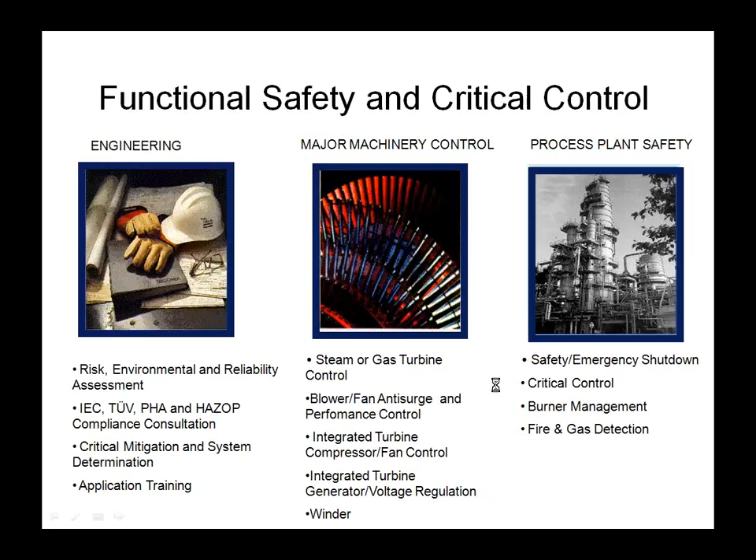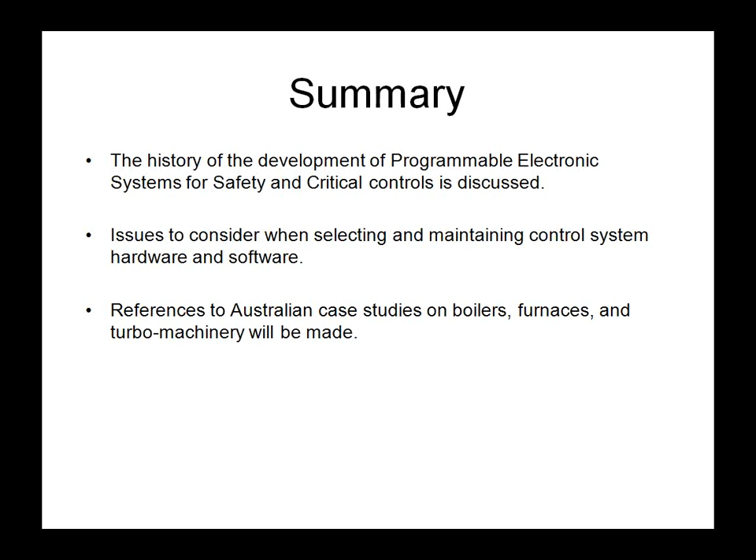Okay, so the talk will cover a bit about the history of the development of programmable electronic systems, which is another word for logic solvers in a safety and critical control context. It will talk a bit about issues when you're either choosing one to buy for the first time or maintaining one your organisation owns, and I'll talk about some examples.

So first of all, just to define what we mean by safety and critical control. Well, virtually everything is safety or critical to somebody. I mean, the air conditioning control on the wall in your office, if it's working okay, it's fine. If it's not working okay, it becomes critical. We had a time in my office in Melbourne, two weeks ago, it went off for a while and it was out of control.

So everybody was really impacted, and that's just a small smattering of the impact of a control system that might be operating a power station or a chemical reactor in an oil refinery. The impact of a malfunction there can be very, very large indeed, not just discomfort of people, but big economic impact or even a safety impact to people and the environment. So very much you would like to have some guidelines to decide what is safety and critical, and unfortunately the answer to that is it all depends.

And people hate me to say that, but it's true. So for example, this air conditioning system, if that happened very frequently, it's a small consequence, a little bit of sweat. If that happened every day, the company would lose so much productivity that we'd have to either relocate or we'd have to suffer some severe economic inconvenience, even after a relatively small, low consequence event at the time. If it happens a lot, it becomes a big consequence.

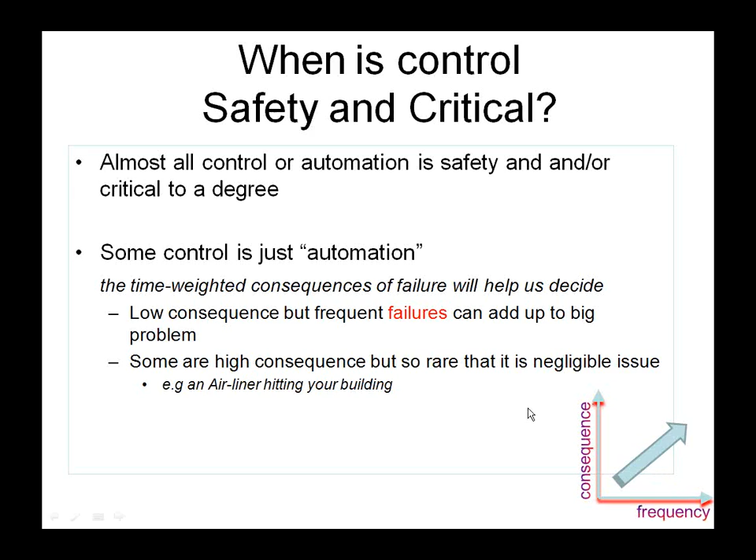So in the down-to-earth situation, if you have a business or a production line that's entirely dependent on the equipment under control, which is the plant that's being controlled by both the combination of the control system and the safety instrumented system, then if that represents a large part of the business, such as an oil refinery, the cat cracker unit is major, then you'd clearly call that critical.

If you had a multi-train LNG plant where you had 3 or 4 or 5 trains producing LNG, sure, if one goes offline, you're not out of business, but just that one train might be making 3 or 5 million tonnes a year of LNG for export. Just that one train by itself is so large it becomes economically significant if you lose it. Same for a large power station. You might have 4 units, but if each one is 500 megawatts or 600 megawatts, then even one unit coming offline has a big impact.

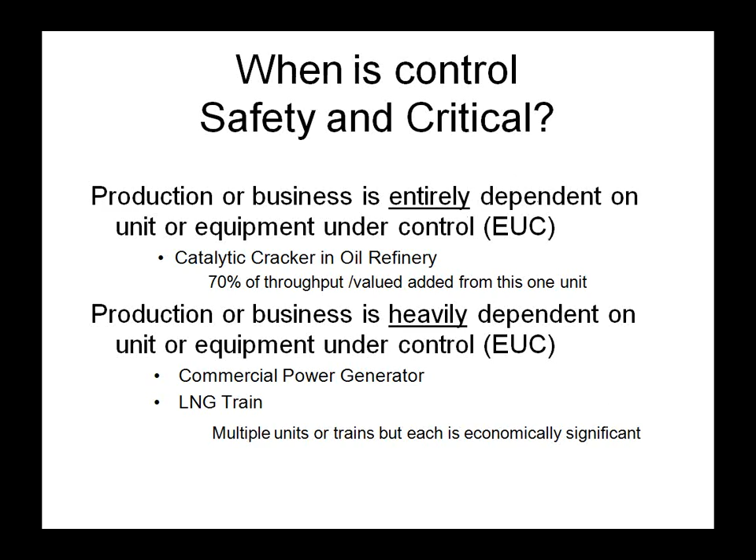So that's the kind of area that I spend most of my time playing in, and that's where a lot of the control applications in that sphere are both safety important and critical to the business. So typically, to summarise, that's where the process is either continuous or almost continuous, and a continuous process obviously has a start, and occasionally it will stop due to a trip or running out of feedstock or whatever it is. So even the best designed continuous plants have to cope with a startup phase and a shutdown phase.

So there's really no such thing in actual definition as truly continuous, but when we say continuous, we mean something that runs in the same state from day to day, week to week, month to month, and the shutdowns hopefully no more often than 4 or even 8 years apart. Typically we're talking about plants that are handling hazardous materials. Obviously natural gas is explosive. A lot of materials are both flammable and also toxic, such as you might find in the chemical industry. They may be even toxic but not flammable, and even that presents a big enough risk to warrant a safety instrumented system.

And of course then you'll have other applications of critical control. It might be in a high-rise building of a particular type, say a hospital, that you can't evacuate very easily, or even a tunnel where you have a lot of traffic, a lot of cars and occupants of the cars in a tunnel; that by itself becomes a critical control environment.

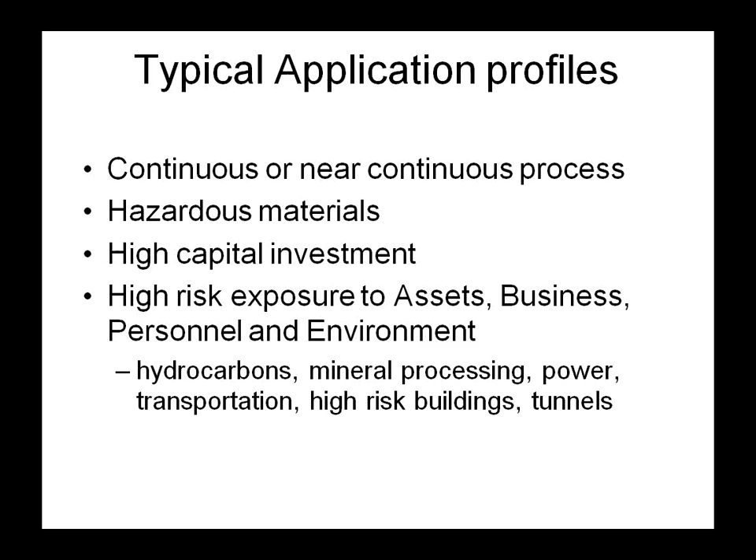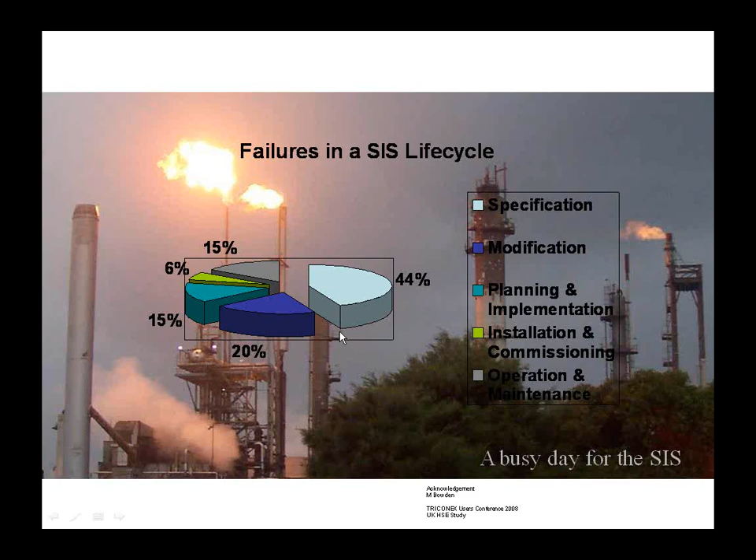So some of you might have seen this slide before. We're talking about the distribution of failures. This little pie chart here is talking about the distribution of failures of a safety instrument system across its life cycle. And I apologise, the colour may not come out too well on everybody's screen, but if you look at the legend there, you see that between specification and planning and implementation, more than half of the failures occur in the design phase. So that's why this is a really important topic for designers, and then a good part of the failures occur during the rest of the life cycle.

But by itself, hydrogen, with the absence of any oxygen, won't be a problem. But if you have an uncontrolled situation and you lose control of your draft, you might get a mixture of air and hydrogen in there. With that heat source, even without it, at that temperature, you can get an explosion very easily. So that's a good example of a critical application.

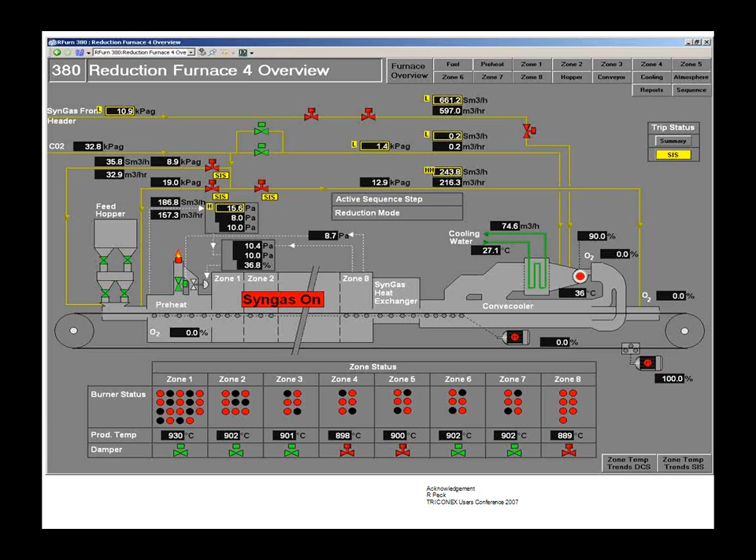So, a few ideas to be considered. Definition of a safety instrument system. Some of these are talking points just thrown out there from other contexts where I've used this presentation. A good question, it's often debated, is a burner management system a SIS? I think 10 years ago that would have been a bit of a debate, but I think these days most people accept that a BMS is a special case of a SIS.

And this is a good one. If your plant hasn't had a safety incident, does it make it safe? I haven't, touch wood, ever had an accident in a car, but it doesn't mean I'm a good driver. I could just be very lucky. So it's not a good idea for me to drive around without a seatbelt on, so I wear one even though I haven't had an accident.

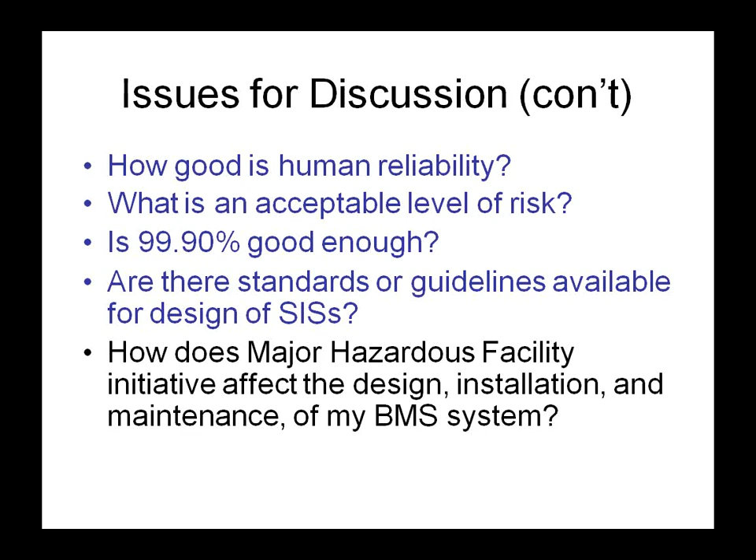So are there standards or guidelines? Yes, there are. There's international standards on this. IEC 61508 is used by logic solver manufacturers, and devices that are used in safety instrument systems, and there's IEC 61511, and both of those are also Australian standards, and they're quite useful for the overall design of a safety instrument system. And finally, major hazardous facilities legislation. It's been adopted across Australia now. So all these major hazardous plants, gas plants, large ones, chemical storages, licence is granted by the respective state government if they've set up effective risk mitigations.

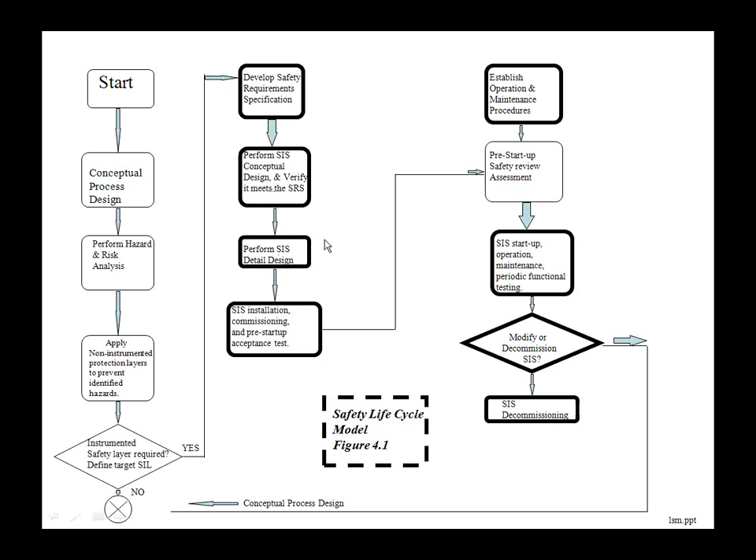So back onto the guidelines that you might look towards. If you look in any of the standards, you'll see a safety life cycle model, because, as we said earlier, that slide where you had the pie chart, more than 50% of your failures occur in the design phase. So that's people who, on this left-hand side here, didn't design for the right faults or didn't design adequately for the plant hazards that existed. So it's very important to have a thorough and well-documented risk assessment process, and then once you have the risks identified, have a well-documented process here for designing a safety instrument system.

Now, the SIS logic solver is responsible for just a part of the plant safety. There are other contributors to the safety, and that's often indicated in this format of diagram, where down the bottom you have fundamentally some safety in view of the design of the plant.

So you might make the piping and the pressure vessels able to withstand the highest pressure that could possibly be put onto that pipe or the pressure vessel, but that becomes uneconomical. So you'll have additional layers that will probably reduce the pressure at some point in the input to a plant to bring it back to an economical level. I haven't got time to go into the trade-offs there of economy versus risk, but by and large you accept the fact that there's going to be a process control system, which might be operating a pressure regulating valve.

It can keep the process plant protected from the high pressure if it's working. If it doesn't work, you might have an alarm that says, hey, look, we've got a deviation from our pressure control loop. And backing that up is a safety instrument system.

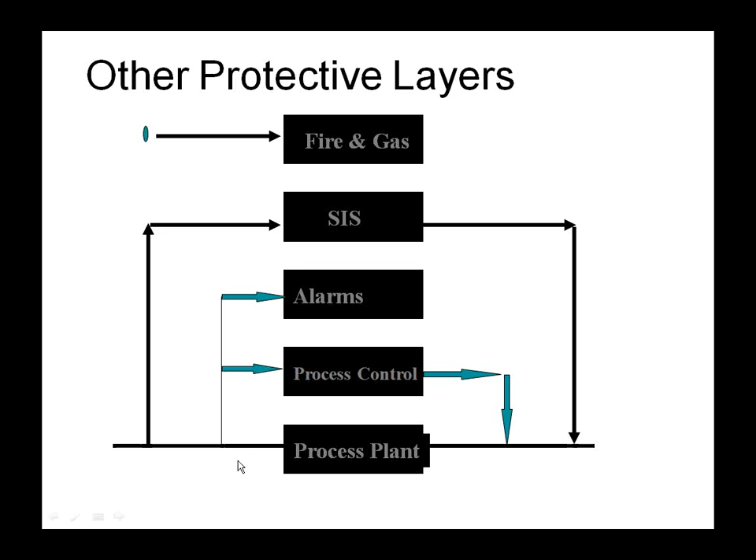And if all of that fails, we have a release of gas or flammable material, then we might have a fire and gas system. It's no longer a prevention system, it's now a mitigation system, which will hopefully detect gas and hopefully then do something about it, raise alarms certainly, and maybe depressurize parts of the plant.

So this is often depicted in this format here, where we have risk across the right here, and we have an inherent process risk. We might be handling flammable gas, like we said. Some of the risk reduction is achieved by virtue of the basic process control system. Some other parts of the risk are absorbed or reduced by the relief valves, safety relief valves, and then whatever's left over is allocated to the SIS. And in the design situation, you'll be playing around with how much risk reduction you take, say, in the safety valves compared to here.

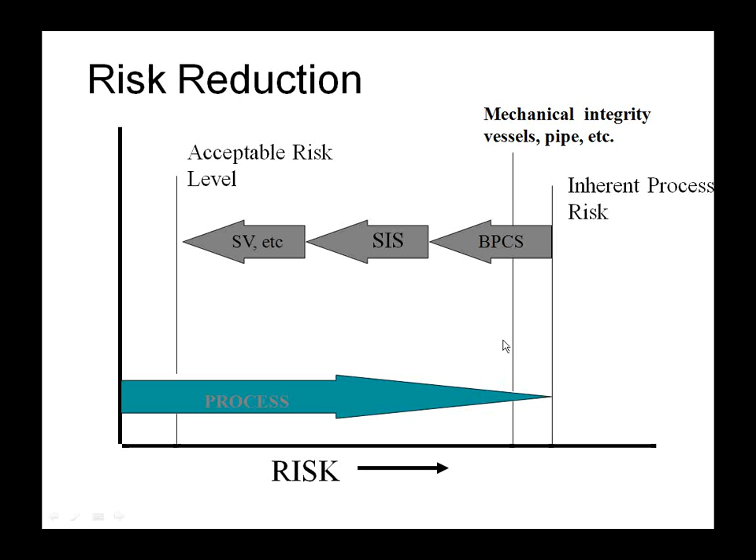One of the most expensive things to do is make the piping and vessels so strong that they can withstand all the pressures that are ever going to be put on them, or ever could be put on them. That would be a rare situation indeed to see that.

I want to talk about the logic solver today. So the logic solver can be pneumatic, can be relay-based, can be a solid-state logic system. More often than not these days, if it's a plant being built from scratch, it's going to be a programmable system, just because it's more flexible and it's easier to make changes, all those good things. And the logic solver might be in a single, dual, triple, quad or more channel configuration.

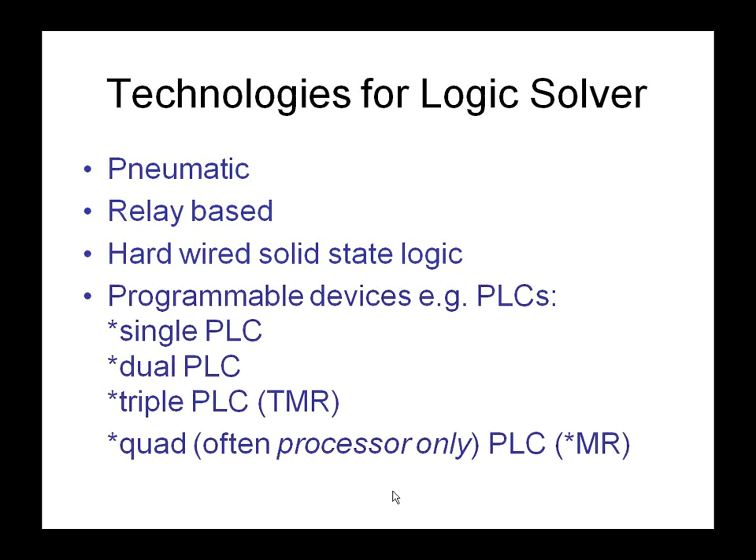So now we'll look at how to increase reliability. We can increase reliability by doing voting in our logic solver. We'll talk at length about that, and also give you some examples of where we do voting in the field devices that are also part of the safety instrument system.

There's another type of voting called 2 out of 2 voting, and you've got to be aware that there's a big difference between 1 out of 2 and 2 out of 2. A DCS, or Basic Process Control System, should vote this way, 2 out of 2, if it's redundant. It should have its outputs in parallel. So if this output here at the bottom goes open circuit, we can still keep our plant running by holding this contact in parallel with it closed.

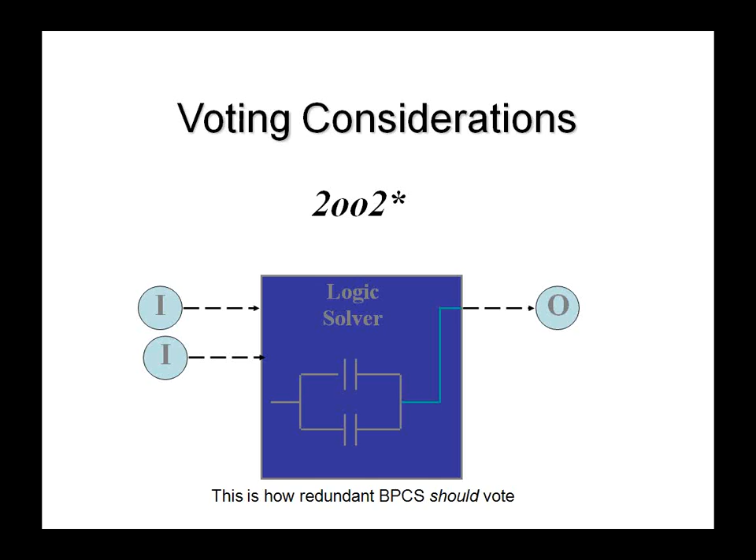So that increases our reliability, because if we had voted that 1 out of 2, every time we had a fault in the DCS, we'd have a trip. So the DCS should vote 2 out of 2, and the safety system, if it's going to be 2 out of 2, won't be very safe. And I'll look at that in a minute. You can also do 2 out of 3, or in fact you can do M out of N. You can do 3 out of 5, 5 out of 9.

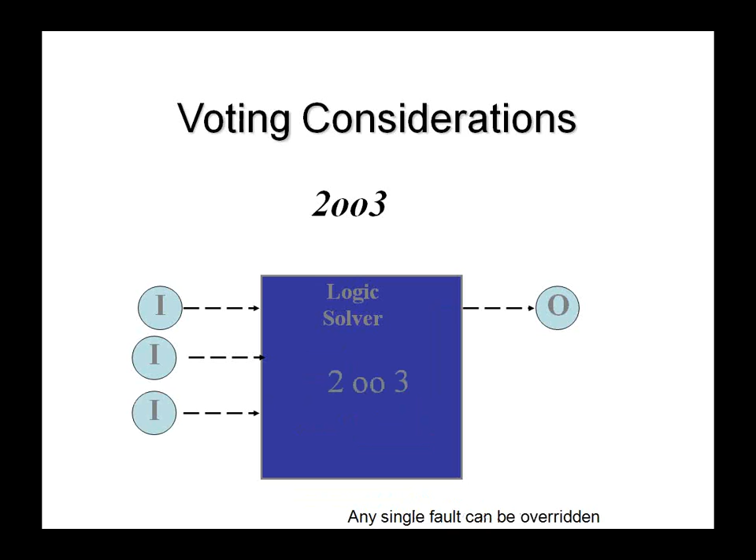An important thing about those multi-channel voting strategies, or multi-channel, i.e. more than 2, is you can have a fault and you can override it, whereas with the classic 1 out of 2 vote, a fault, if it's of a safety-related nature, will cause it to shut down. But in a multi-channel system with more than 2, i.e. 3 or above, one single fault can be overridden and you can still operate safely.

But the problem is, having 2 of them, we've actually doubled our spurious nuisance trip rate from 1 in 25 years to basically 1 in 12 years, because we've got twice as many of them, we'll fail twice as often. So if we're doing a 1 out of 2 vote on that basis, we've actually got a good safety outcome, but we've got a pretty poor process availability outcome. Remember, if we've got, say, 10 pairs of these 1 out of 2 voting pressure switches, we'll have, on average, 1 failure every year. If we've got 10 pairs of them, each one going to fail 1 in 12 years, then we'll have 10 failures in 12 years.

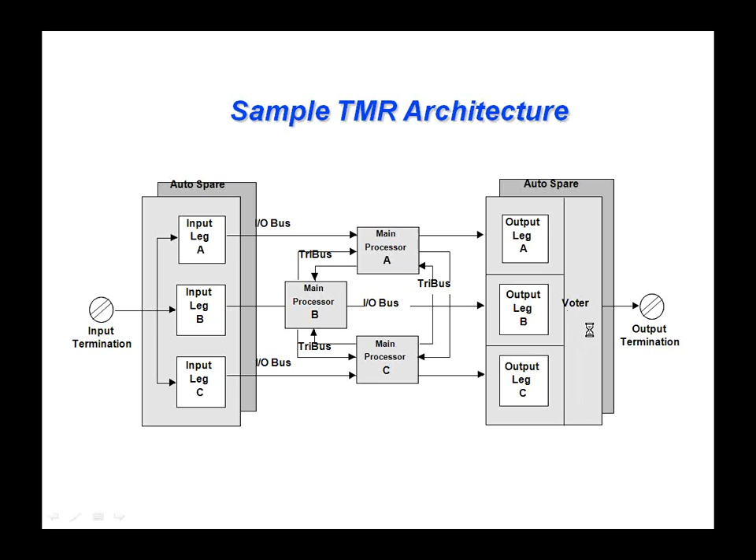So a 2 out of 3 voting architecture: one of the manufacturers, the one I work for, Triconex, has an architecture like this, and I'll just quickly step through it. It has 3 processors, and then importantly the I/O is also triplicated, so the inputs are read 3 times for each point in the field, and the outputs are also handled by 3 separate outputs, and then there's a hardware voting circuit for every point.

So this is a bit of a detailed look at the way the input module is working. We might have 32 or 64 points on our input module, but each point is being read by 3 separate circuits, and its result is being passed across an I/O bus to a main processor. It's happening here, it's happening here. There are things like dangerous failure modes which could exist, such as a short-circuited opto-isolator. Remember, these safety systems don't expect to experience changes in their input very often, so

we'll have maybe a pressure switch hooked up to this input. All things being well, that pressure switch is going to stay there for 4 years or 8 years in the closed contact condition. How do we know we're ever going to be able to see an open contact in the field? If we get an open contact in the field, we'll have no volts here and we'll have a 0 here, but we've normally got a 1, obviously, because this is normally a closed contact, giving us volts here and a 1 here.

What this little bit of diagnostic circuitry does is we have a self-checking function where the input is actually short-circuited, pulled down, so the voltage at this point is pulled down to 0 by this solid-state relay here, which forces the opto-isolator to read a 0 output.

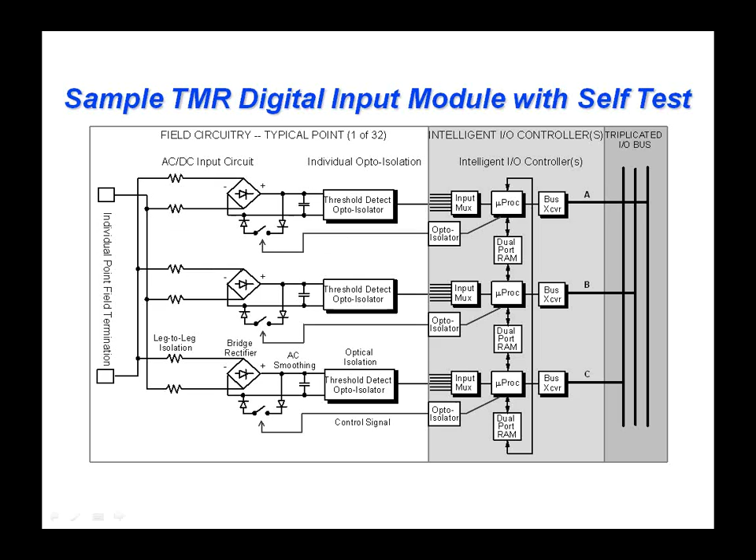If we don't get a 0 output read, we will know we've got a fault either in the multiplexer or in the opto-isolator. So that's a typical self-diagnostic circuit. You'll find that on most safety PLCs. I'd say all safety PLCs should have something like that. So this is not proprietary to Triconex or anything, this idea. It's just a good basic building block, and one of the things that distinguishes a safety PLC from a regular PLC.

So by doing that sort of diagnostics, this is how we get the ability to continue to run when we get a discrepancy between the 3 legs. So that previous slide was about a digital input, but for analog inputs, we expect to see 3 readings in very much the same range. If we've got a 3 TMR analog input, because there's some noise on the signal, we expect them to be reading slightly differently from each other. Every time they're read, we normally expect the red and the green and the blue to be randomly one higher than the other, or taking it in turns, or not quite turns, but randomly.

We expect them to be the same within a certain error band, but if one value goes off, perhaps up past the trip point, then having the other 2 in more or less agreement with each other will allow us to keep running and achieve a high reliability on the plant.

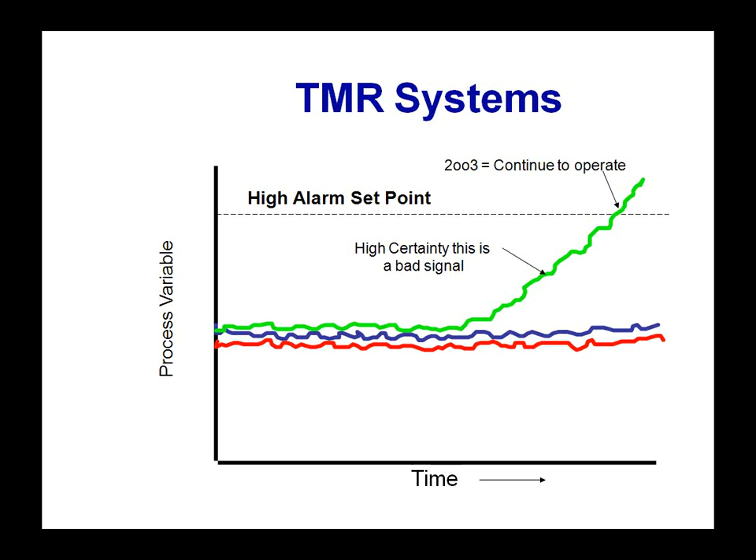With digital outputs, same type of thing. We have a fault-tolerant voting circuit. Remember I said there's a voting circuit on the output of every point. So this part of the circuit represents the common circuitry for 32 points, and this part of the circuitry is now for every individual point. We've got a circuit consisting of 4 switches.

The purists amongst you might think we should have 6 switches here, so we can have A in series with B, and B in series with C, and C in series with A. But if you look closely at this switch here, it's actually driven by the result of A and B. So this becomes basically the Boolean equivalent of a circuit with 6 switches. It just has 2 less switches, so it's more economical and it takes up less space. Then it means in a given space we can use bigger sized transistors. These are solid state devices, they're field effect transistors usually, and the bigger they are, the more current they can conduct. So it's good to maximize the size of them on your circuit board.

So that voting circuit is in itself diagnosed. That would be a fault-tolerant circuit. If processor A, for example, goes bad and gives us a 0 output, we can maintain 1 output via B in series with C, because this one will be open, that one's open. And you can go through and see any other combination of single failure of the processors or switch itself. If this switch is stuck closed, we can override it. We can open this switch, and this one, of course, which is not stuck, and bring our output to the de-energized state.

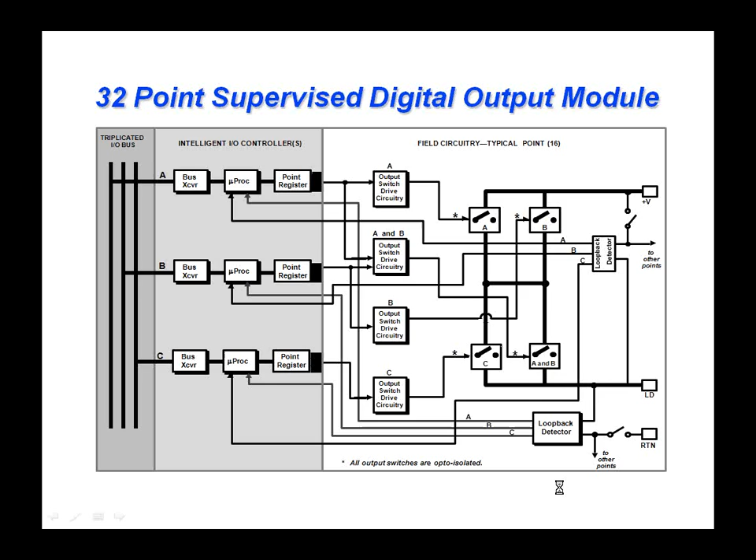If it was a type of circuit where that pulse would be seen, you can turn what we call voter diagnostics off at a point level, so that if that particular point is driving some electronic input which could respond to a 1 millisecond pulse, you turn it off and achieve that diagnostic function manually on a scheduled maintenance basis. It's obviously much better, and the way people normally do it, to leave the automatic self-checking going on all the time. Same for analog outputs.

We have a triplicated analog output circuit where each leg takes it in turn for 1 scan cycle at a time to drive the current out to the field, and we have loopback diagnostic to confirm that if the processors are trying to send a 12 milliamp output, that's compared to what's actually going out, and if it's not the right value or significantly different than what it should be, that diagnostic will recognize that and will turn that leg off, put a fault flag on the front of the module, telling the user that there's maintenance required, but meanwhile it'll continue to operate on the other 2 legs, and basically for a long time.

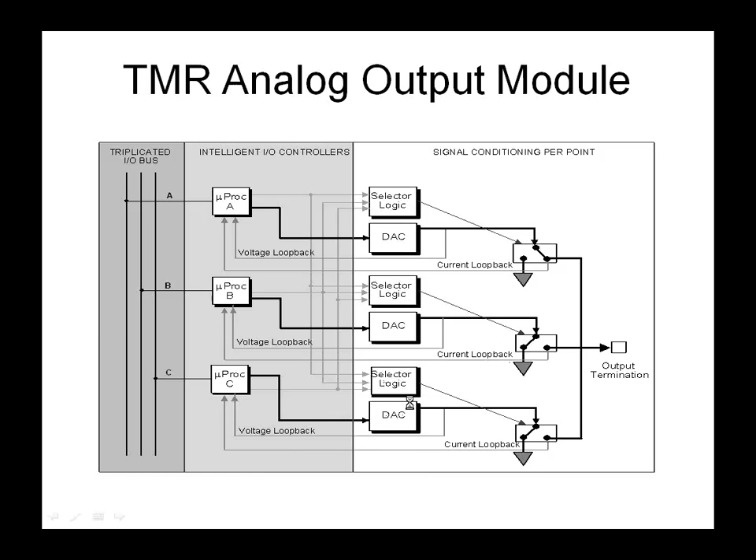So one of the things to look for there in a system is no single point of failure. Having those diagnostics, like we just went through some examples of, and also being able to repair the logic solver online. If you can do those three things, you've got a reasonably good system, potentially. Bear in mind also, this no single point of failure, that's sometimes a misunderstood concept.

The TÜV approval for a safety PLC will talk about no single point of failure making the PLC unsafe. But if you think about the owner of the plant's point of view, he wants to know not only is the plant safe, but can it make product, can it make ammonium nitrate, can it make LNG? And if a single point of failure can cause a trip, that is a big economic penalty, and it has even greater impact if you look at it holistically.

Think about the number of times a plant has accidents. It most often, when you get down to it, happens during startup or shutdown. So having a reliable plant which doesn't trip spuriously is actually more safe than having a plant which does have a high rate of nuisance trips. And it's sad, but it's true that the TÜV approval process omits that consideration, because the TÜV can only look at the box in isolation.

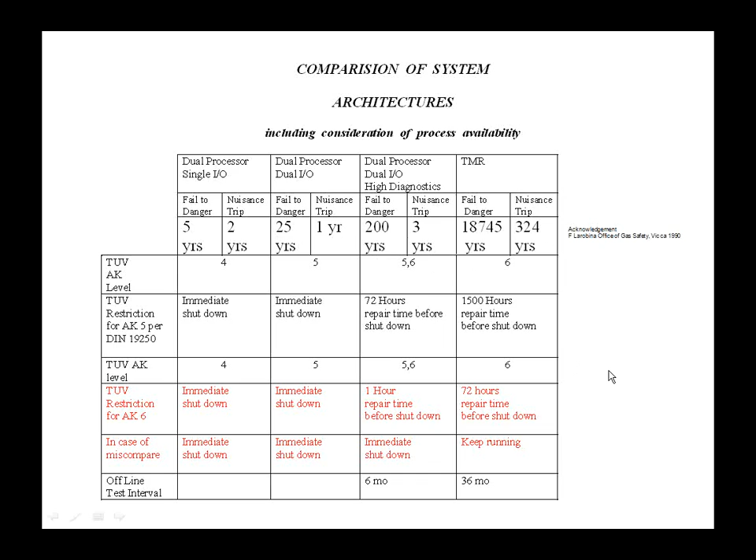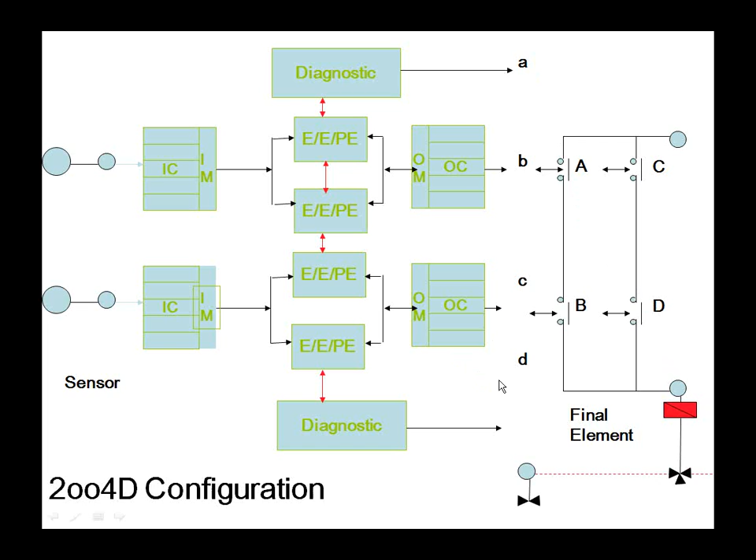It wouldn't be fair not to talk about the other architectures. So this is a classic 2 out of 4 configuration, and the 2 out of 4 has 4 somethings. It's got 4 processors here, and it's got 4 switches, so it definitely looks like 4 to me. But hang on a minute, over here on the left we've just got really 2 inputs. And if you look closely, there's 2 output circuits where this switch is being driven. This switch here is actually the diagnostic channel, and this one D is also the diagnostic channel. So in effect it's really a 2-channel system.

The processors, certainly there's 4 of them, and they're doing some sort of comparison diagnostics. Just another way of drawing it, that's out of the TÜV report for that particular system. This makes it a bit clearer, because the TÜV is trying to do their job. So they're correctly labelled here that the processors are really 2 pairs of 1 out of 2, and the outputs are actually 1 out of 2D, and the inputs are 1 out of 2D, D standing for high diagnostics.

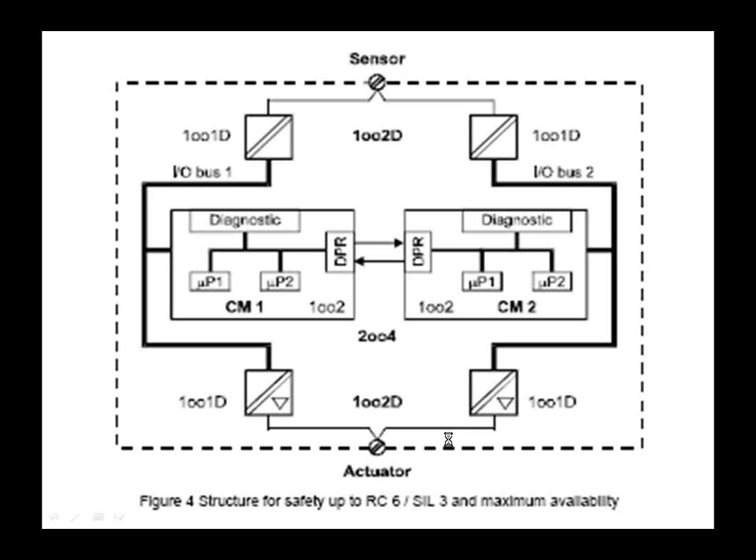You can get this information from TÜV websites here. I won't go through it, of course, but it lists some specific restrictions that particular systems should follow. You can get access to this information from either the TÜV website or from the vendor. It's best if it's available on the TÜV website. It'll tell you any restrictions that might apply to that system, because some of the systems are available in different configurations, and some of those configurations have more restrictions than others.

So this is another architecture, and this is looking even better, isn't it? It's got actually 4 inputs and 4 processors here, and 4 outputs now, so that's looking good. Get to the fine print, we'd actually find that we've got 2 systems here, because it really only operates on 1 channel at a time. It'll switch over automatically between one and the other, so they're both getting exercised. But the most important thing is that this pair, it's either all running or none of it's running, and same for this pair. So in another way of thinking, it's actually just a 1 out of 2 system.

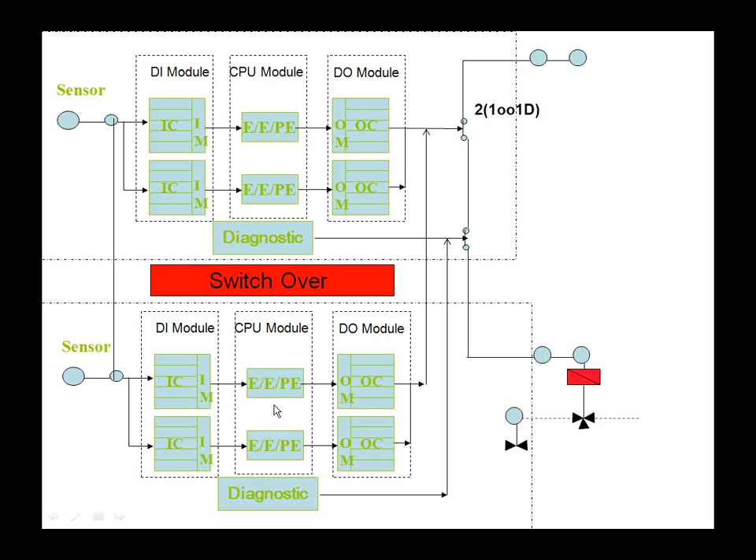So there's a fair bit of mythology, and you don't have to spend too long in this sector before you'll hear people like myself coming up with all sorts of analysis and statements about the particular product. So I wanted to just try and dispel a few of the myths. I guess this is, from my experience, what are myths and what are facts. All this is subject to debate if you'd like to discuss it. Happy to do that.

Well, one thing's for sure is the more electronics you have, the more failures you'll have. If you had 100 mobile phones, you'll have more failures than if you have one mobile phone. 100 cars, more failures than one car. So more electronics, more failures.

The other thing is common mode failure. There's a lot of talk about common mode failure. I have to sort of skip across a lot of the details of some of these things, but I'm just sort of making you aware of the issues. The IEC standard talks about common mode failures, talks about not sharing common parts, services or support systems, not sharing operational maintenance procedures, and physical separation.

And that's important because if the manufacturer is using a particular semiconductor microprocessor chip, say, in his DCS, and he happens to use the same microprocessor in his safety system logic solver, this is actually going contrary to this philosophy here, because you can have an unexpected and unwelcome, but definitely real event where the semiconductor manufacturer has to call the manufacturer of the safety system and say, look, we're really sorry, but we've got a batch of chips and it's got this dangerous failure mode.

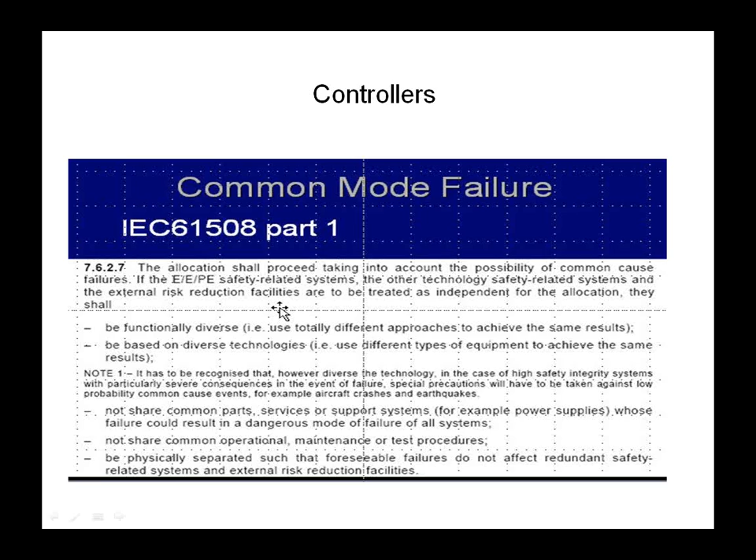The IEC 61511 standard, which reflects the requirements of the overall SIS, also talks about common cause and what to do with it. And again, it emphasises here that the TUV approval is only looking at the safety PLC by itself. It doesn't look at whose DCS you're going to use that safety PLC with. So it's really up to the owner, or his advisor, to give unbiased advice on what the overall combination of a particular BPCS and SIS is.

And all too often we see that's overlooked. I guess everybody hopes that somebody is worrying about it, maybe they think TUV is worried about it, but TUV specifically hasn't, because there's no way they can know whose DCS the system is going to be used with.

All right, so another fact, definitely a fact, is that the impact of a failure depends on the architecture. In a 1 out of 2 system, failure is going to lead to a trip. In a 2 out of 3 or M out of N, it won't lead to a trip if it's a single failure.

Another fact is that people can distort figures to produce a high safe failure fraction. The safe failure fraction is a type of failure that is in the safe direction. So it's like a relay circuit going open circuit, that would usually be called a safe failure because we expect that's what's going to happen.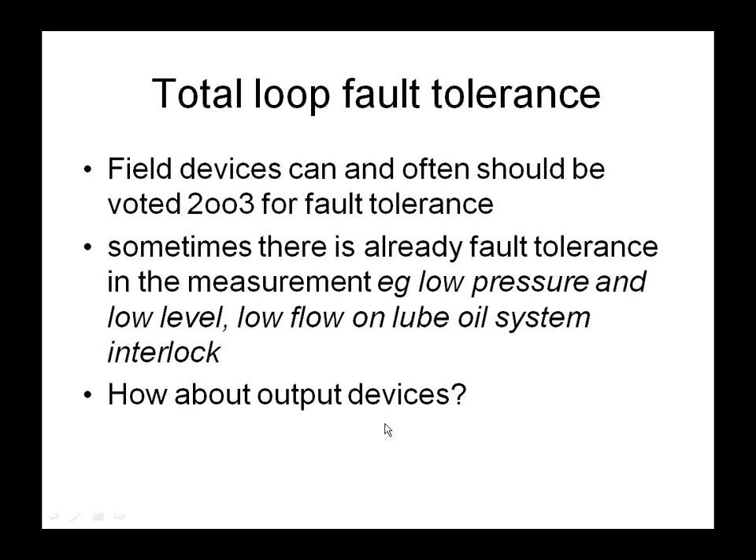A much better design, which is available now, was a 2 out of 3 voting solenoid valve, which has 3 valves, and one of the valves can fail either stuck open or stuck closed, and it's the way it's piped to achieve this 2 out of 3 voting. We have pressure switches to detect the status of the valve output. There's actually 4 pressure switches. You need 4 pressure switches to check the 3 valves. I haven't got time to go into the details of that, but it's true.

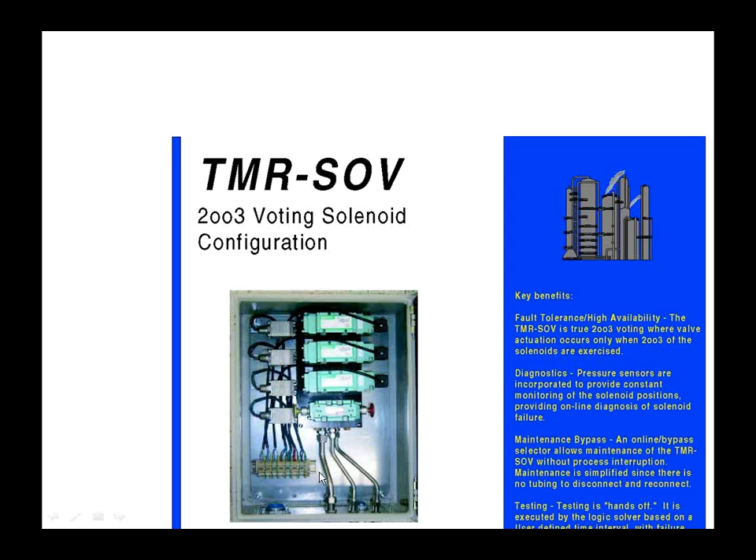And under control of the logic solver, you can de-energize the solenoid valves one at a time and check by the feedback from the pressure switches that all the valves are doing the right thing. And if one of them isn't doing the right thing, you can replace it online. So this is an example of where it's used on a big pipeline that's quite important for a lot of people in Victoria.

These solenoid valves were a bad actor, as I call it, a contributor to a high spurious trip rate and potential interruptions to gas supply. The main valve itself is very robust with a very big spring, so if you vent the air off it, it'll close. But replacing the single solenoid valve with this triple solenoid valve would greatly improve the reliability.

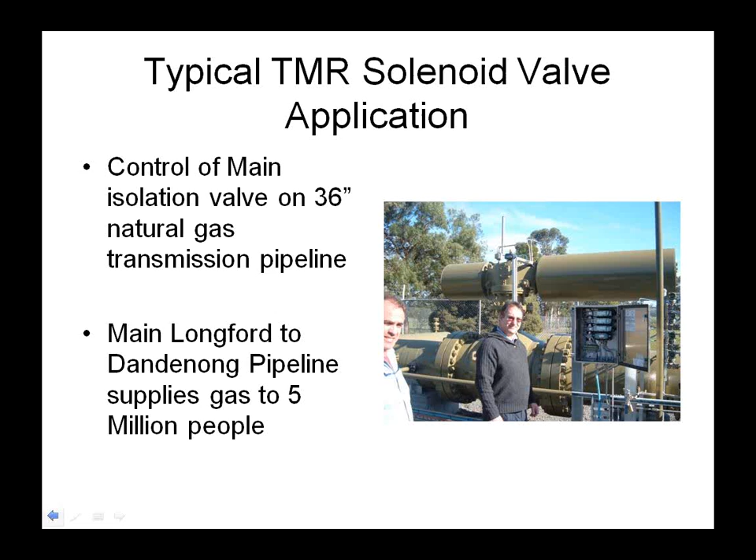Can you please give the link to the TUV website for further information? Yes, for sure, absolutely. Oops. I just lost it. Getting to the end there.

Thank you. So I've just got Mark Glickman. He's raising his hand, so I'll just unmute you, Mark.